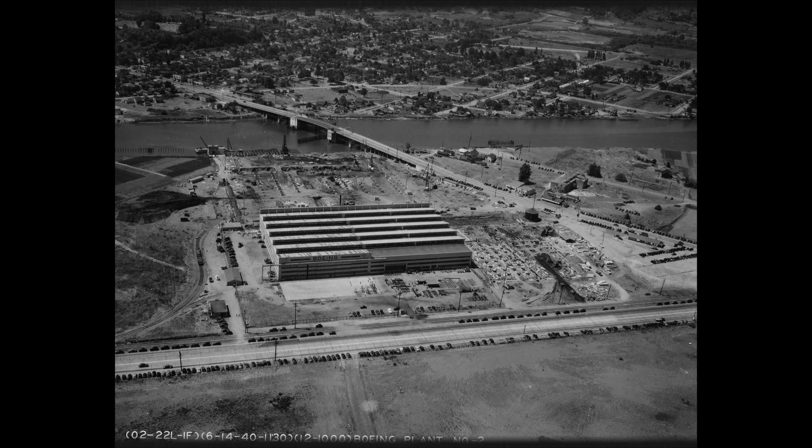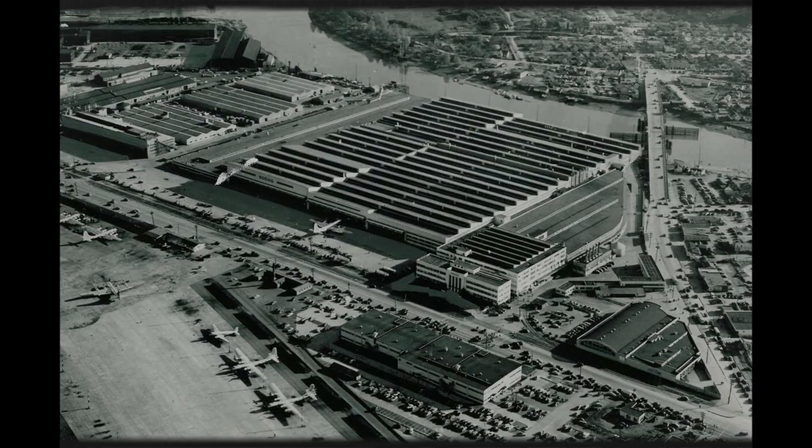Imagine it's January 1942. Deep in the heart of Seattle, Boeing Plant 2 is supposed to be the beating heart of America's war effort. Its mission is simple, monumental, and utterly vital: to pump out so many B-17 Flying Fortresses that their sheer numbers would literally darken the skies over Nazi Germany.

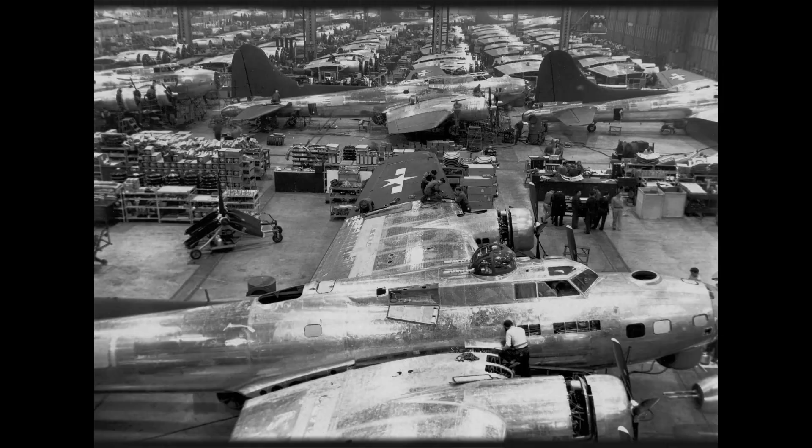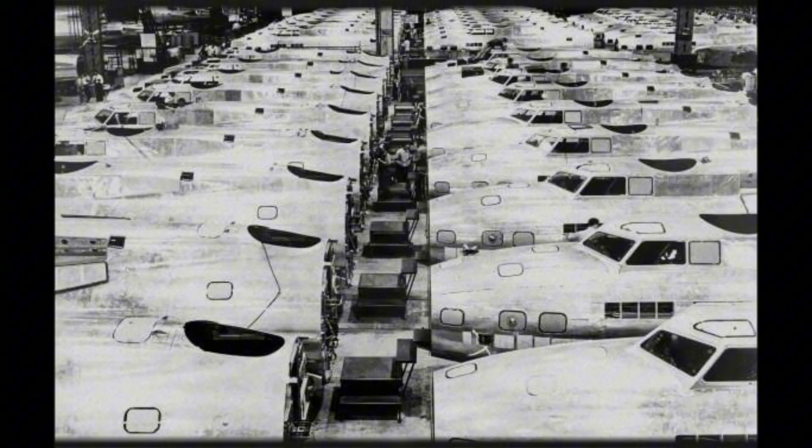But on the factory floor, there's no triumphant roar of production. There's only the grinding, deafening silence of failure. It looks less like an assembly line and more like an industrial traffic jam. 63 B-17 bombers, 63 magnificent, deadly promises, sit frozen in various stages of incompletion. Each one is a monument to a promise America couldn't keep.

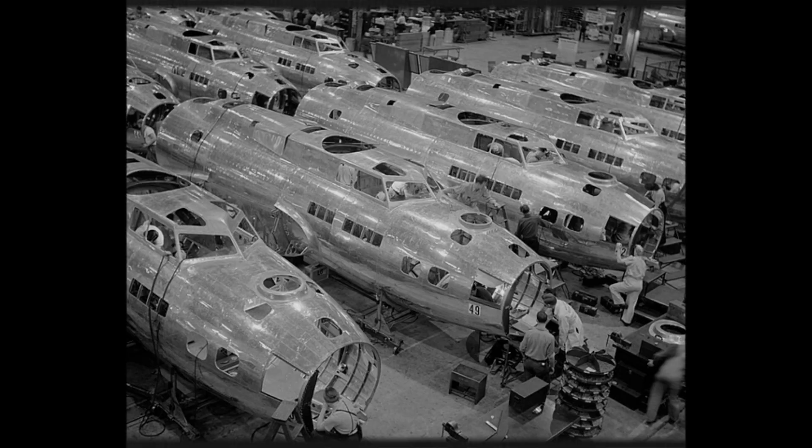The numbers were horrifying. The Army Air Forces, desperate for air power, had ordered 3,615 bombers to be delivered throughout the year. 3,615. And how many had Boeing managed to deliver? 9. Just 9. General Henry Hap Arnold, the commanding general of the Army Air Forces, wasn't just disappointed, he was furious. This wasn't a spreadsheet problem, it was an existential threat.

On January 15th, he met with a room full of terrified Boeing executives, and he didn't mince words. The message he delivered was brutally clear. Without bombers, there would be no strategic bombing campaign. Without a strategic bombing campaign to cripple German industry from the air, American soldiers would have to face an entrenched, fully supplied Nazi war machine on the ground for years. The math was simple, and it was terrifying. Every day of delay would be paid for in blood.

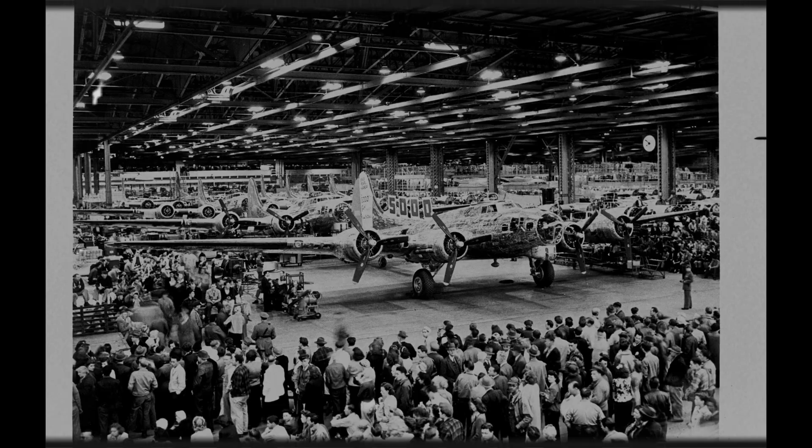So what was the problem? It wasn't manpower. In a patriotic frenzy, Boeing had hired over 30,000 workers in just 6 months. Many of them were women, Rosie the Riveters, who had never set foot in a factory before, but who were now the backbone of the war effort. It wasn't materials either. The aluminum giant Alcoa was shipping in raw materials faster than Boeing could possibly use them. Mountains of gleaming aluminum sheets sat waiting.

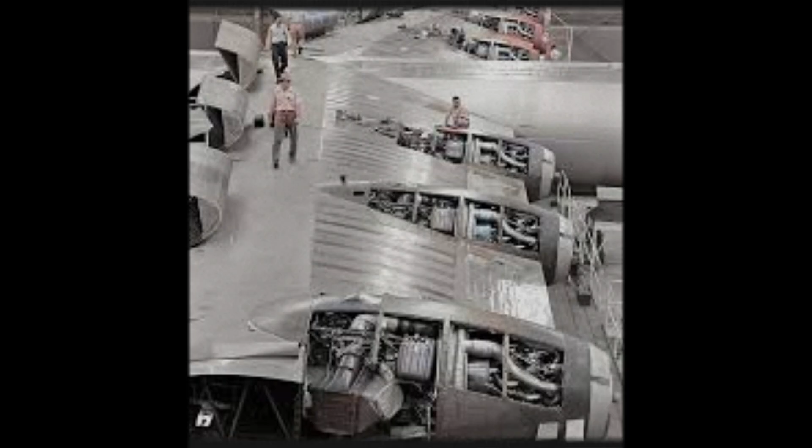The crisis was something deeper, something nobody had anticipated. The bombers themselves, they were just too damn complex to build quickly. Think about this. Each B-17G model required 140,000 individual parts. The wings alone were a nightmare. A single wing demanded 12,000 rivets per side.

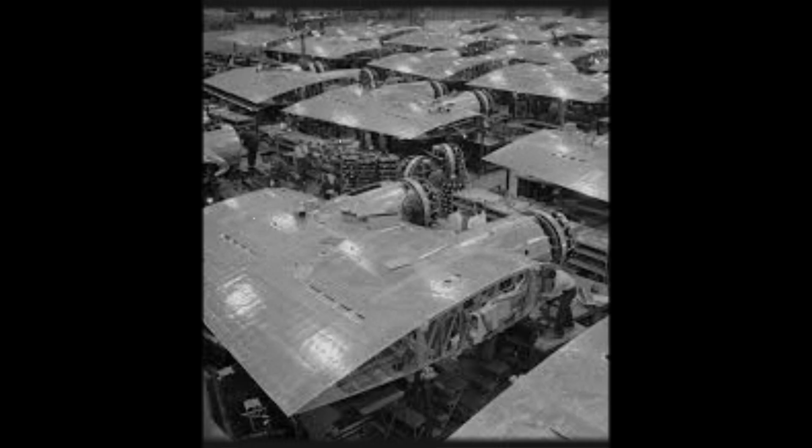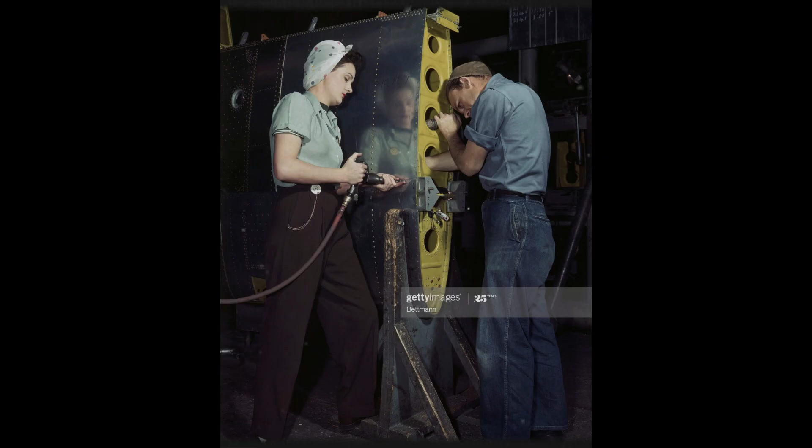These weren't just simple fasteners. They had to perfectly connect 7 overlapping layers of aluminum skin to a complex internal framework. And that framework had to be strong enough to withstand the unimaginable stresses of combat maneuvers, pulling up to 6 Gs while dodging enemy fighters. The traditional assembly methods, the ones perfected on smaller, simpler aircraft, had simply collapsed under the weight of this complexity.

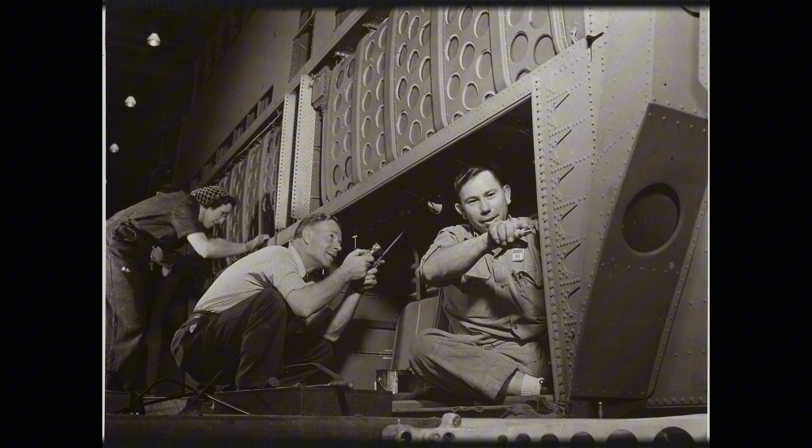Every morning at 5 a.m., Philip Johnson, Boeing's production manager, would walk the factory floor, clipboard in hand, and watch the same soul-crushing nightmare unfold. He'd stop at Wing Assembly Station number 4. There, 17 workers were clustered around a single massive wing section. They weren't working together so much as they were getting in each other's way.

The choreography was insane. A riveter would finish a seam, step back, and immediately another worker would need to access the exact spot he had just vacated. Then a third worker needed that same position for a different rivet line. It was a chaotic ballet of inefficiency.

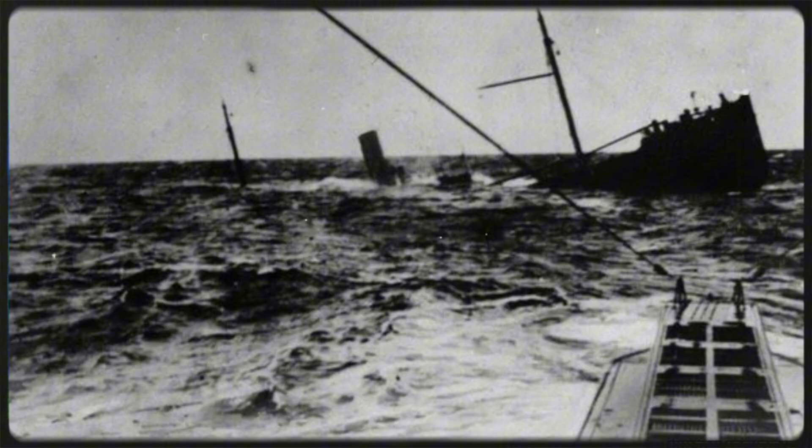Johnson timed it himself, clicking his stopwatch with a growing sense of dread. 20 hours and 14 minutes. That's how long it took to complete one wing assembly, from a bare framework to the final polished rivet. 20 hours. Over the skies of Germany, the British Royal Air Force was losing bombers faster than that.

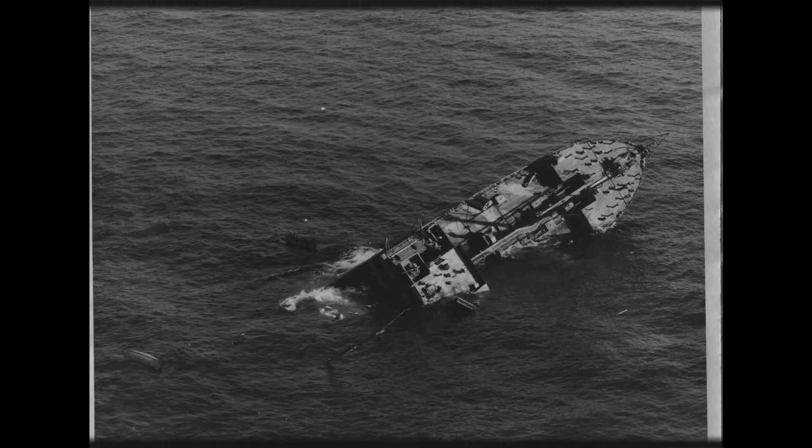The consequences of this bottleneck rippled across the entire war. Every Luftwaffe fighter that went unchallenged because American bombers weren't in the sky meant more merchant ships, full of vital supplies, were being sunk in the cold Atlantic. It meant more factories in the Ruhr Valley could run at full capacity, churning out tanks and guns for the Eastern Front. It meant more time for Nazi Germany to consolidate its iron grip on Europe.

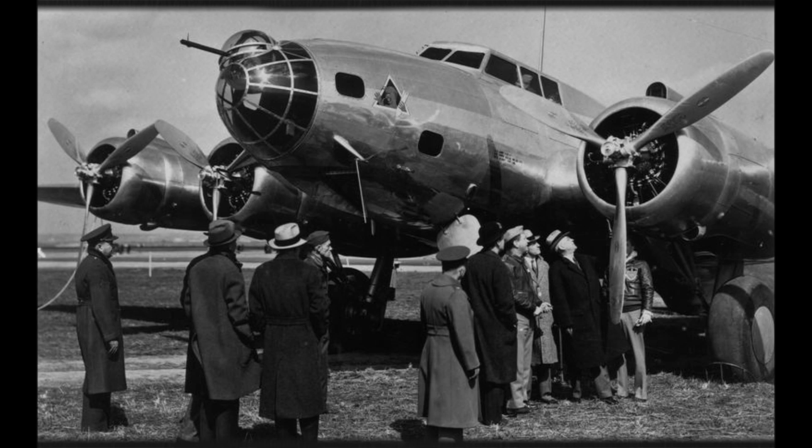Boeing's engineers, the best in the world, had tried everything they could think of. They redesigned tool access points. They created specialized jigs and fixtures to hold the wing sections. They even experimented with different crew sizes, thinking maybe fewer workers would reduce the congestion.

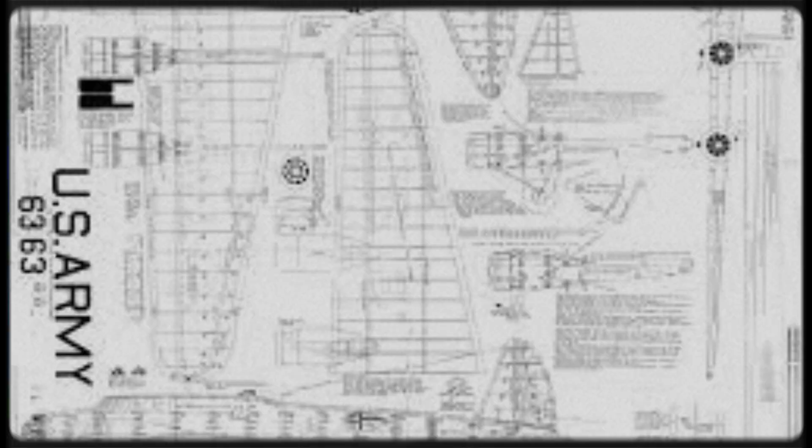Nothing worked. The fundamental problem was written into the aircraft's DNA. The rivet pattern, specified in the holy grail of engineering blueprints, required work crews to access the same physical space in an overlapping sequential order.

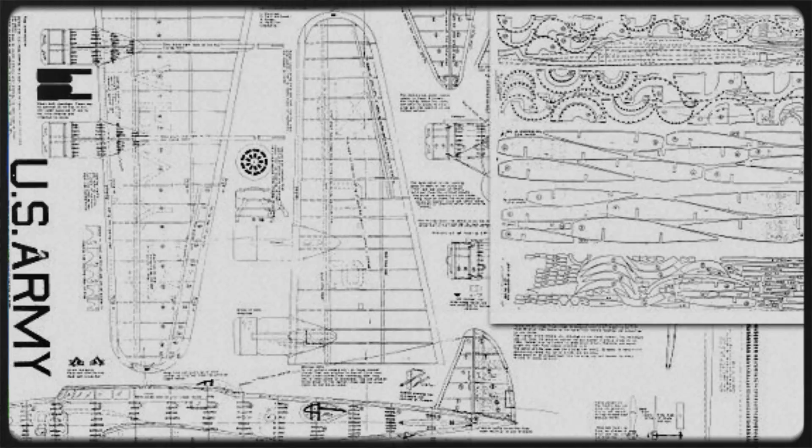You couldn't parallelize the work. You couldn't just throw more workers at it to speed it up. It was a bottleneck designed by geniuses, a perfect trap. By late January, the whispers began. Boeing executives started having quiet, desperate conversations about the unthinkable, telling the Army they simply couldn't meet the production targets. Some even suggested bringing in rival companies like Douglas or Consolidated to take over primary production. It would be a humiliating, catastrophic failure.

On January 28th, a classified memo circulated among senior management. The subject line read, "Crisis Assessment, B-17 Program Viability." The subtext was clear. Nobody wanted to be the person who lost the war because they couldn't figure out how to rivet a piece of aluminum fast enough.

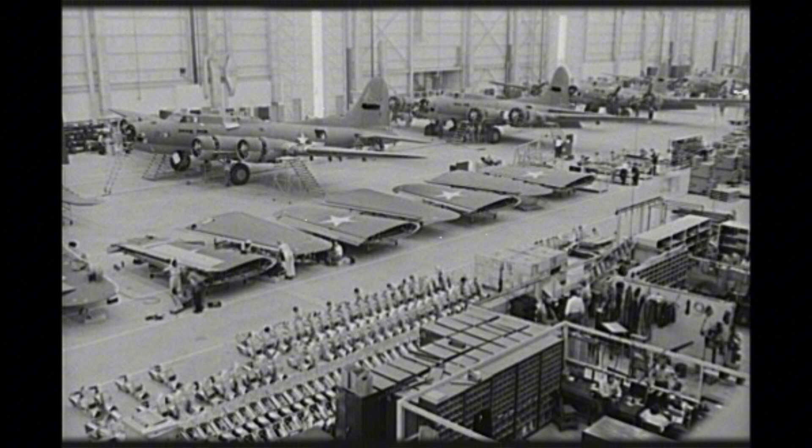Let's zoom in. Walk into Wing Assembly Station 4 on any given morning, and here's what you'd see. What looked like organized chaos that wasn't actually organized. The wing section, a massive skeleton of aluminum ribs and spars spanning 32 feet, lay on an enormous jig. Waiting beside it were 7 layers of aluminum sheeting, each one precisely cut and pre-drilled with thousands of holes, ready to be attached in a very specific sequence.

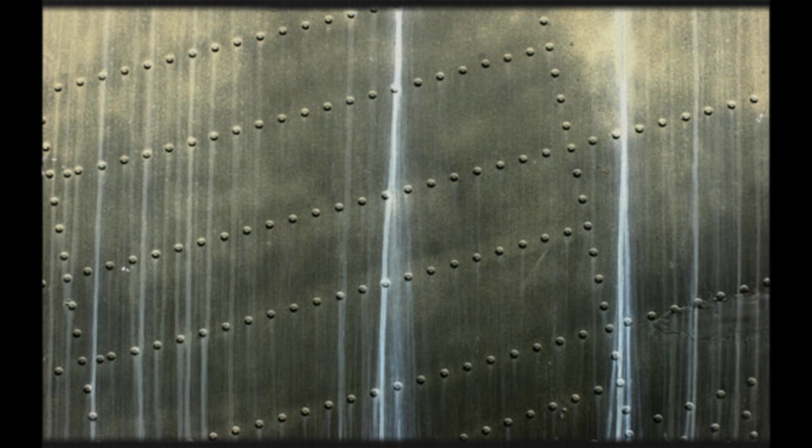The process was supposed to start from the wing root, the thick part that would eventually bolt to the fuselage, and work its way outward toward the delicate wingtip. Sounds straightforward, right? It wasn't. The engineering blueprint, a document treated with near religious reverence, specified that the rivets had to be installed in perfect parallel rows running from the wing's leading edge back to the trailing edge. Row 1, then row 2, then row 3, marching backward like disciplined soldiers.

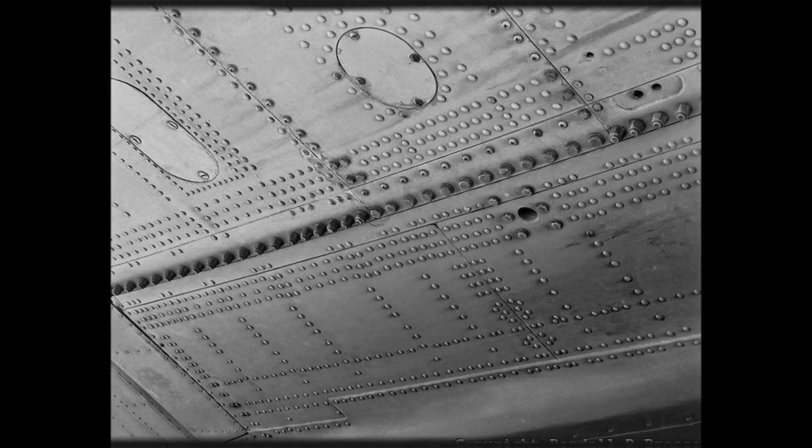From a structural perspective, this made perfect sense. Each row of rivets reinforced the one before it, creating an overlapping shingle effect that brilliantly distributed stress loads across the entire wing surface. The engineers at Boeing's developmental center had calculated every single rivet's position to optimize the strength-to-weight ratio. On paper, it was beautiful, a masterpiece of structural engineering. On the factory floor, it was a disaster.

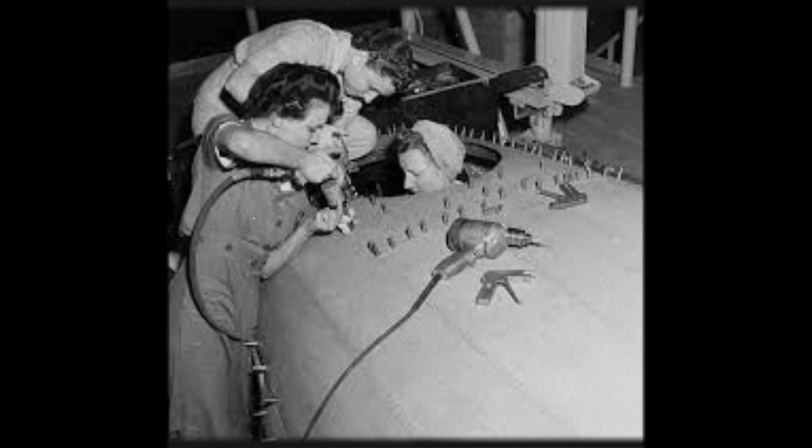Miss that timing by even half a second, and you got a loose rivet, a useless rivet, a rivet that had to be painstakingly drilled out and replaced. Each mistake cost 3 minutes. Multiply that across 12,000 rivets, and a few small mistakes quickly became a catastrophic loss of time.

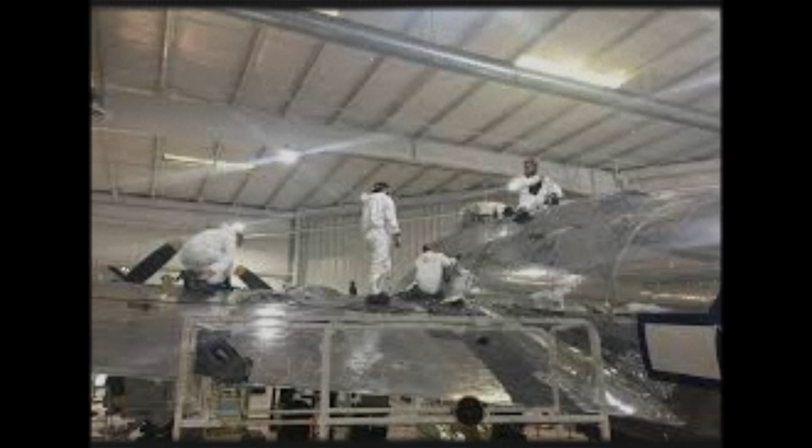But the real nightmare began when it was time to start row 2. To access row 2's rivet line, the new work crew needed to position themselves exactly where row 1's crew had just been working. Except, row 1 wasn't completely finished. Quality inspectors needed to check every 10th rivet with a borescope, a tedious, painstaking process that took a full 15 minutes per wing section. So, the row 2 crew waited and waited. Meanwhile, the row 3 crew, already suited up and ready to go, stood around, burning daylight, watching the clock tick.

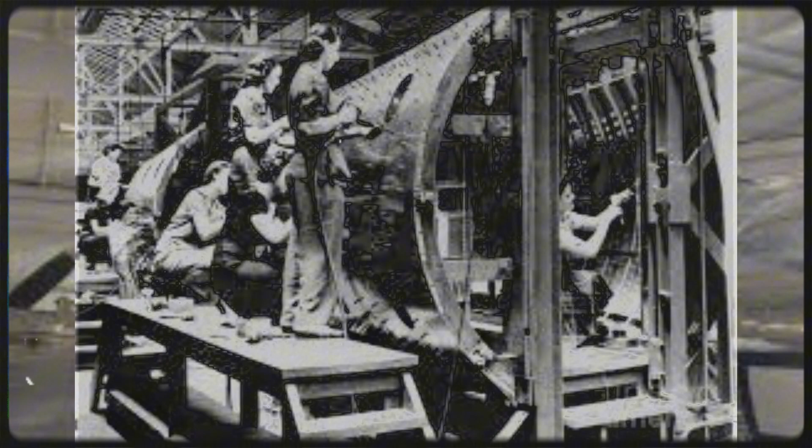The production schedule was a fantasy, calling for parallel work streams that the physical reality of the wing's geometry made utterly impossible. You simply couldn't fit enough people around the structure to rivet multiple rows at the same time. And then there were the tools themselves. The rivet guns weren't delicate precision instruments. They were industrial pneumatic hammers that vibrated with such force they shook your entire body when fired.

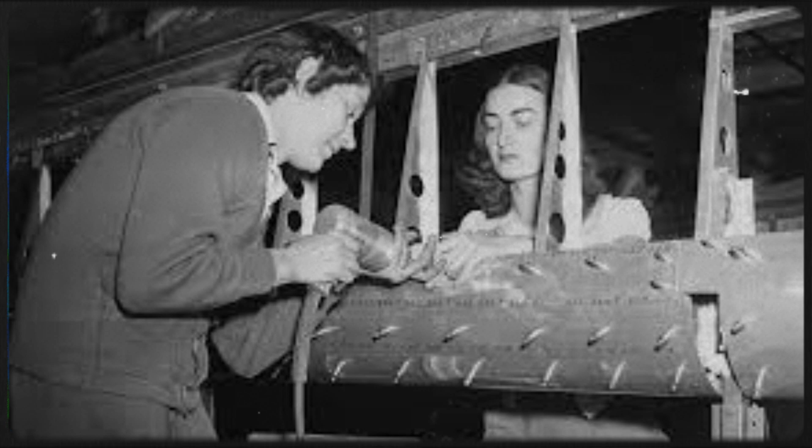The compressed air hoses that powered them snaked across the factory floor like demented pythons, constantly getting tangled with electrical lines for the inspection lights, tripping up workers who were just trying to move from one station to another. Think about it. One riveter moving from position A to position B had to unplug his air hose, carefully coil it up, navigate around 3 other workers, find a new air coupling station, plug back in, and only then could he resume his work. That 30-second process happened 70 times per wing section.

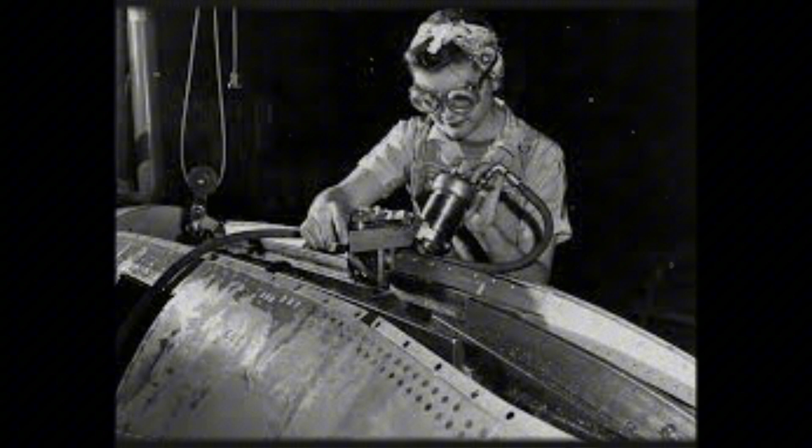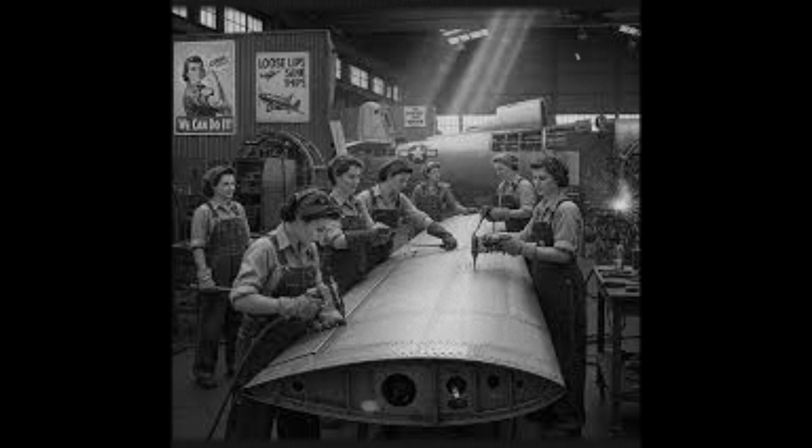The aluminum sheeting, an excellent conductor, absorbed all that heat and began to expand microscopically. Not by much, just 0.03 of an inch per 10-foot section. But when you're trying to align pre-drilled holes that have a tolerance of only 0.02 of an inch, that expansion was a disaster. Holes didn't line up. Riveters ended up spending 15% of their time using tapered reamers to enlarge holes that had shrunk out of alignment as the metal cooled. None of this, the tangled hoses, the heating, the thermal expansion, appeared in the engineering specifications, because nobody in a clean, quiet office had ever anticipated 17 people working in such close proximity for such an extended, exhausting period of time.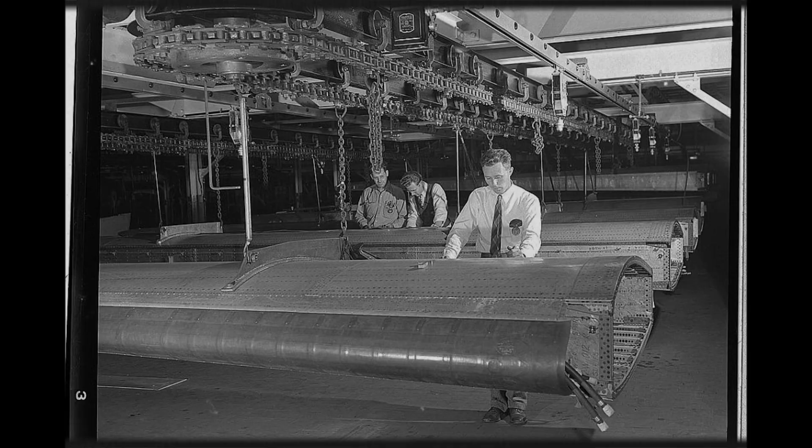Frank Szymanski did not look like the man who would change the course of the war. He was 31 years old, 5'7", with hands that were permanently stained with aluminum dust and cutting oil. Before Pearl Harbor, he'd worked at a Chrysler plant in Detroit, installing door panels on Windsor sedans. It was repetitive work, mindless work, the kind of job where your hands knew what to do long before your brain caught up. When Boeing started its massive hiring surge in late 1941, Frank packed up his wife and 2 daughters, moved to Seattle, took a room in a boarding house near the plant, and joined the swing shift at the now infamous Wing Assembly Station 4. He started work at 4 p.m. and finished at midnight, 5 days a week, sometimes 6 when production quotas were particularly desperate.

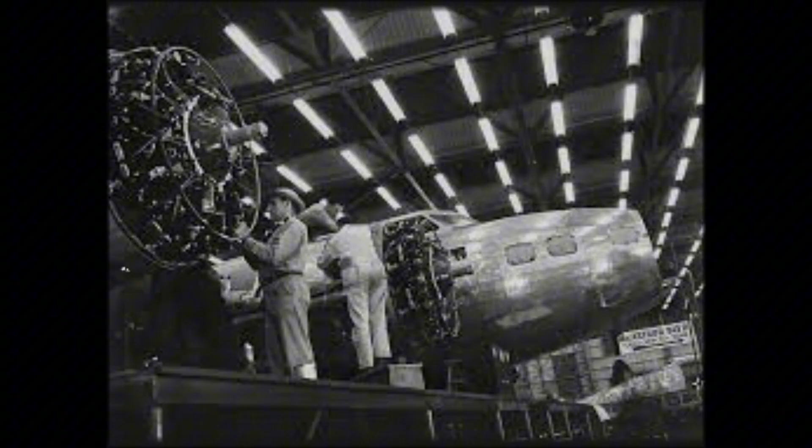What made Frank different wasn't his riveting skill. Dozens of other workers could match his speed and precision. What made him different was that Frank couldn't stop watching. He didn't just see his own work, he saw the whole broken process. Most riveters focused on their immediate task: line up the gun, squeeze the trigger, move to the next rivet, repeat 400 times a shift. But Frank saw the entire ballet. He noticed that Jenkins, working on row 3, was always waiting for Patterson to finish row 2. He noticed that Patterson was always waiting for the quality control team to clear row 1. He saw, with a clarity that seemed to elude everyone else, that the prescribed sequence created a cascade of delays that compounded geometrically as you moved across the vast surface of the wing.

On February 4th, during his midnight break, Frank sat on an overturned parts crate, eating a bologna sandwich and staring at a completed wing section that was being moved to final assembly. Something about it bothered him. The rivet pattern looked perfect from a structural perspective. Each row neatly overlapped the previous one, creating that shingle effect the engineers loved so much. But Frank kept thinking about his old job at Chrysler. When they installed door panels, they didn't start at one edge and work their way across. They started at 4 corners simultaneously and worked toward the center. Why? It was simple. Because it allowed 4 workers to operate in parallel without ever getting in each other's way.

The geometry of the door panel made parallel work possible. He looked back at the wing schematic posted on the station's bulletin board. The rivet pattern ran in those perfect, straight lines, from leading edge to trailing edge. Parallel rows marching across the wing surface. But the wing itself wasn't a flat rectangle. It was a complex, 3-dimensional structure. It had depth. It had internal ribs creating separate chambers. It had access points at specific, designated locations. And then the idea struck him. A question so simple and yet so profound.

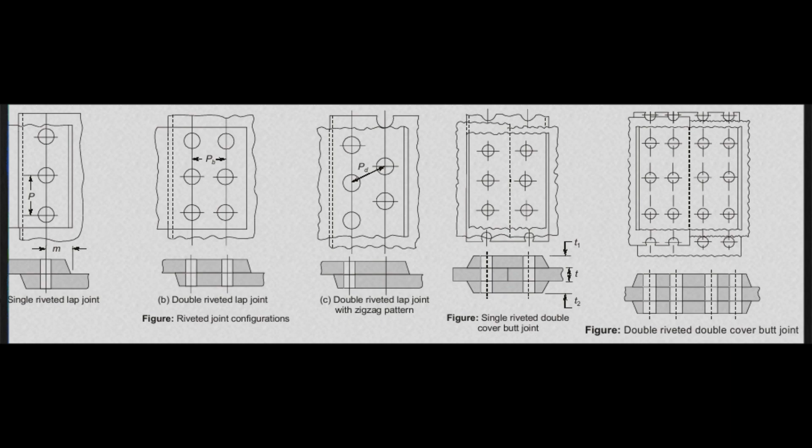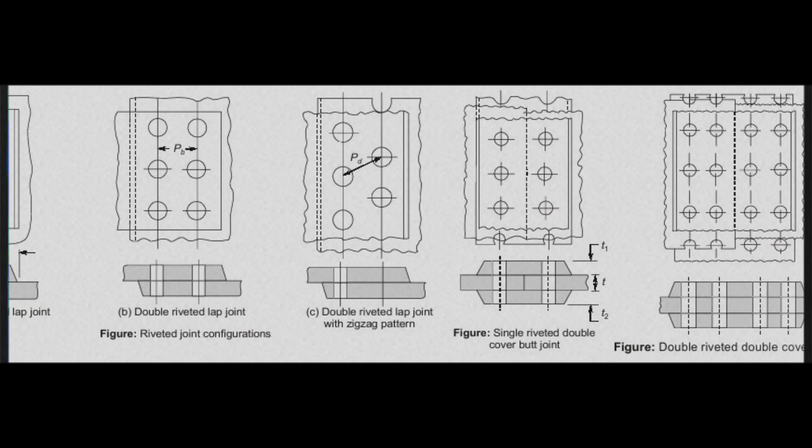Instead of those neat straight rows, he drew a pattern that looked almost random. He drew clusters of rivets around the strong internal structural ribs where access was easiest. Then he drew radiating lines connecting those clusters, following the natural contours of the wing's internal structure. It looked wrong. It looked like someone had spilled a box of rivets on the blueprint and just decided to leave them where they fell.

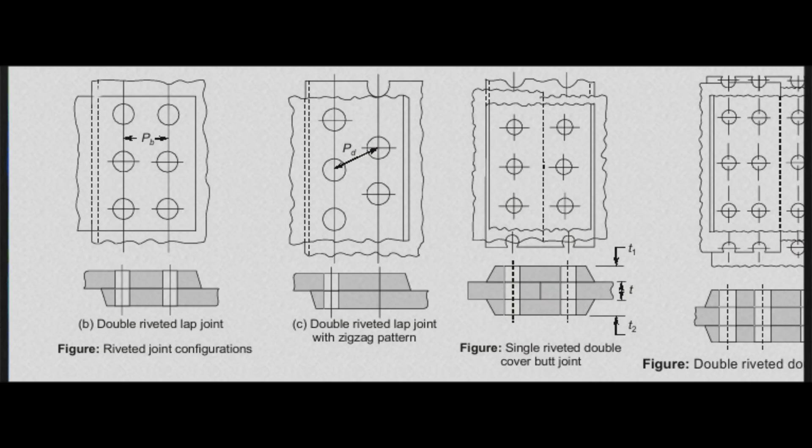But as Frank traced the pattern with his calloused finger, he realized something crucial. With this pattern, you could have 5 workers riveting at the same time, and none of them would ever need the same physical space. Worker 1 could be at the wing root, inside the main spar chamber. Worker 2 could be mid-wing, accessing the interior through an inspection panel. Worker 3 could be working on the trailing edge, which was shallow enough for top-down riveting without even needing a bucker. They'd never intersect. The traffic jam would disappear.

The structural implications worried him, though. He knew the engineering blueprint specified that parallel row pattern for a reason. Words he only half understood, like load distribution and stress concentration, echoed in his mind. But then he thought about something else he'd noticed on the floor. Rivet failures almost never happened where 2 rows met. They happened at transition points, where the wing skin changed thickness, or where cutouts for the fuel tanks interrupted the neat pattern. The rows themselves weren't magical, they were just one way to distribute fasteners across a surface. Maybe, just maybe, they weren't the only way.

Frank knew what would happen if he, a lowly riveter, walked up to a production supervisor with his scribbled time card. They'd smile politely, pat him on the back, tell him the brilliant engineers had spent months calculating those rivet positions, and send him back to his station. The hierarchy in Boeing Plant 2 was rigid. Engineers designed, supervisors managed, workers assembled. Nobody expected innovation from a guy whose job title was Riveter Grade 2.

But Frank had one advantage. He worked the swing shift. And the swing shift supervisor, a man named Bill Hendricks, was different. Hendricks had started as a sheet metal worker himself before being promoted in 1940. He still had the grit of the factory floor under his fingernails. And he actually listened to the workers, a trait that made him either remarkably progressive or dangerously naive, depending on which manager you asked. On February 11th, Frank caught Hendricks during the 8 p.m. shift change, and, his heart pounding, showed him the sketch. Hendricks stared at it for a long, silent time.

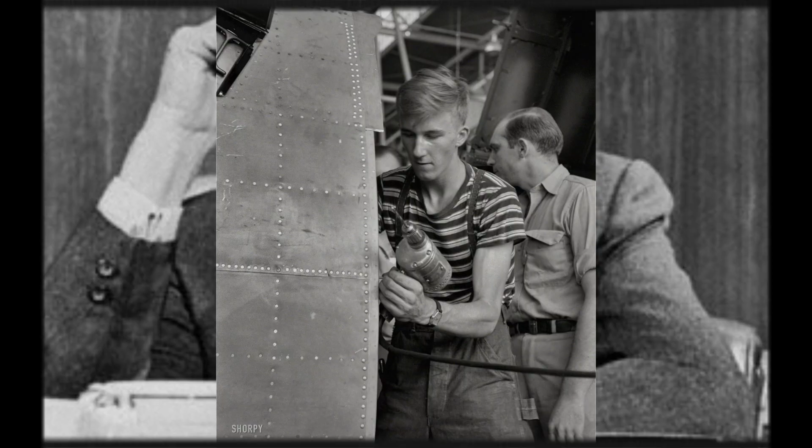The principle Hendricks was describing was the gospel of modern aerospace engineering. It came from the work done by the legendary Theodore von Karman and his team at Caltech in the late 1920s. They had proven, mathematically, that fastener patterns in load-bearing structures needed to follow what they called stress trajectories, the invisible lines of force that flow through metal under pressure. A B-17 wing carrying 6,500 pounds of fuel plus the structural weight of 4 massive engines experienced enormous bending stress during flight. The bottom surface was under tension, trying to stretch apart. The top surface was under compression, trying to squeeze together. Right along the middle, the neutral axis, the stress approached zero.

Von Karman's equations showed that fasteners needed to be densest where the stress was highest, and could be sparser where stress was minimal. The parallel row pattern achieved this perfectly. Each row corresponded to a specific stress magnitude, with rivet spacing meticulously calculated to match the load requirements. Frank's pattern threw all of that out the window.

His clusters placed dense rivet concentrations around the structural ribs, not the stress lines. His radiating connections followed the convenience of worker access, not the calculated load paths. From a classical engineering perspective, it was gibberish, utter nonsense.

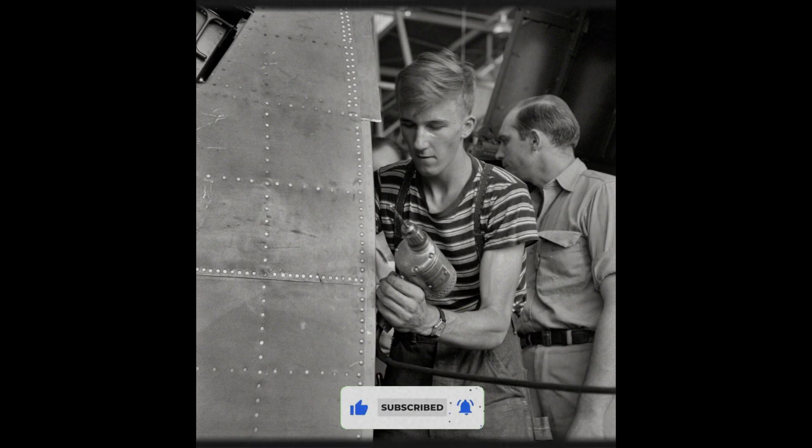Sure, the wing might hold together during taxi tests, it might even survive the first few flights. But under the sustained, violent stress of combat, microfractures would inevitably develop where the rivet pattern failed to match the stress pattern. Those fractures would propagate, the wing would fail, men would die.

Hendricks explained all of this to Frank right there on the noisy factory floor, shouting over the rhythmic roar of the pneumatic guns. Then he asked a question that changed everything. But did von Karman ever consider assembly efficiency as a structural factor? Frank looked confused. Hendricks leaned in closer.

Think about it. If it takes us 20 hours to rivet a single wing, and we're making mistakes because our workers are exhausted and cramped and tripping over each other, how many of those 12,000 rivets are actually installed to perfect specification? How many are slightly loose because the bucker missed his timing? How many holes are slightly reamed out because they didn't align perfectly? Your pattern might be theoretically weaker, Frank, but what if it produces practically stronger wings because the installation quality is perfect?

This was heresy. Absolute heresy. Boeing's quality control processes were built on the assumption that workers followed the procedures correctly. The procedures were designed around the engineering specifications. If wings were failing quality checks, you didn't change the design, you retrained the workers, or you fired them and hired better ones. You didn't redesign the damn aircraft to accommodate worker limitations. That was backwards thinking. That was letting the tail wag the dog.

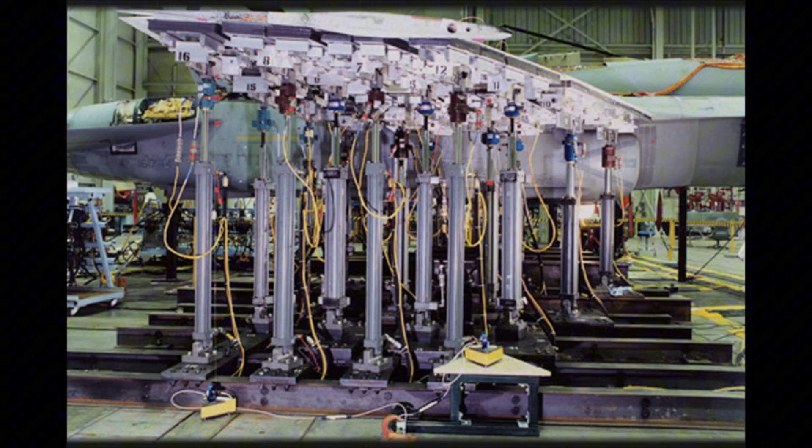He called over Jimmy Chen, the graveyard shift's lead quality inspector, without explaining what he was looking at. Chen, a meticulous and notoriously grumpy inspector, grabbed his toolkit and started a full inspection protocol, the same one he'd run on 200 previous wings. He checked rivet spacing with calipers. He used a thickness gauge to verify the sheet metal compression. He tapped each rivet head with a small ball-peen hammer, listening for the solid thunk that indicated a proper seating versus the hollow ping of a loose rivet.

40 minutes later, Chen looked up, bewildered. "This passes," he said. "I don't know what crew did this, but it's the cleanest work I've seen in months." Douglas told him how long it took. Chen thought he was joking. Then he thought the stopwatch was broken. Then he started his inspection all over again, because wings that were riveted that fast shouldn't be this clean. There had to be mistakes, rushed work, something wrong. He found nothing. The wing was perfect.

Better than perfect, actually. Chen had been inspecting B-17 wings since July 1941, and he kept a private log of defect rates that he never showed to management.

The average wing had around 140 rivets that needed some kind of attention during quality control: loose rivets, misaligned holes, various installation errors. This wing had 11. Just 11, less than one-tenth the normal defect rate.

But passing a visual inspection didn't mean the wing would survive under real flight loads. The rivet pattern was still, from a structural engineering standpoint, completely and utterly wrong. Douglas knew they needed a real test, the kind that required massive equipment and authorization he absolutely did not have.

At 3:30 a.m., he made another unauthorized, career-ending decision. He called the night crew at Boeing's structural test facility in Building 7 and told them to prepare for an emergency stress test. He didn't mention that the wing used an unapproved, heretical rivet pattern. He just said they needed rush testing on a wing section for production validation purposes.

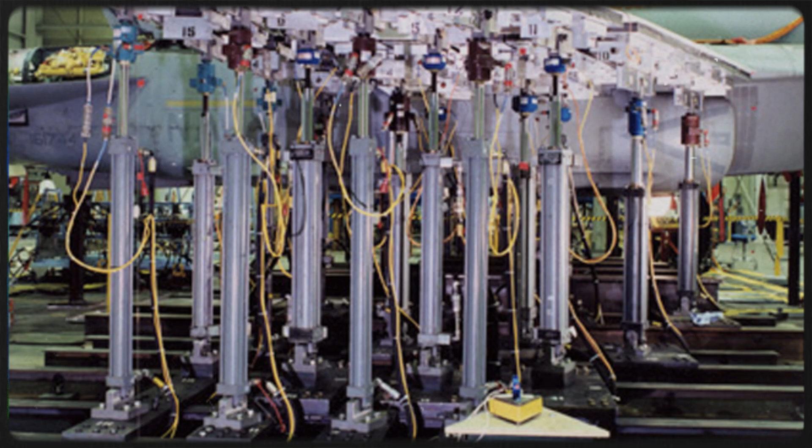Douglas stood there at 5:47 a.m., the dawn light beginning to filter through the grimy factory windows, trying to understand what he was seeing. Frank's pattern had placed the rivet clusters around the main structural ribs, and those ribs were the primary load-bearing members of the entire wing.

By concentrating the fasteners exactly where the structure was strongest, Frank had accidentally created a pattern that reinforced the wing's natural load paths, instead of fighting against them. The radiating connections between the clusters acted like secondary stress distributors, channeling the loads away from weak points.

It wasn't random at all, it was organic. It matched the way forces actually flowed through the structure, not the way engineers in an office thought they should flow.

By 6 a.m. on February 21st, Douglas knew he had to take this to someone who could actually authorize a full-scale implementation. Not Eccles, the chief engineer, who would kill it on principle alone. He went straight to the top.

He went to James Murray, Boeing's vice president of operations, waking him up at his home in the wealthy Laurelhurst neighborhood. Murray arrived at the plant at 7:15 a.m., still in his weekend clothes, and demanded to see everything: the test data, the inspection reports, the time logs.

He watched Douglas's hands shake as he confessed everything they'd done without authorization. Murray's face was an unreadable mask of stone. Then, Murray asked the only question that mattered.

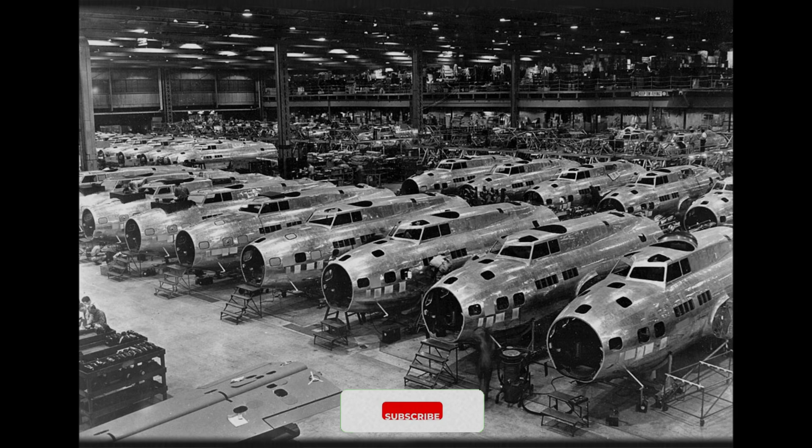Can we train 200 riveters to use this pattern by Monday? Douglas hadn't even thought that far ahead. He'd been so focused on proving the concept worked that he hadn't considered the logistics of scaling it. But Murray was already doing the math in his head. If one wing assembly went from 20 hours to just 2 hours, and Boeing had 42 wing assembly stations, that meant they could increase wing production by a factor of 10 without hiring a single additional worker.

Wings were the bottleneck. Fuselages were being assembled faster than they could be mated to wings. Tail sections were stacking up in a corner of the factory, waiting for completed aircraft. The entire production line was being choked by the speed of wing assembly. Fix that, and everything else would flow.

That morning, Murray made the call. Over Eccles's screaming objections, over protests from the entire engineering department, over dire warnings from Boeing's legal team about liability if the wings failed in combat, Murray ordered the new rivet pattern implemented across all production lines, effective February 25, 1942.

He gave Frank Szymanski a $40 a week raise, a fortune at the time, and the brand new title of Production Methods Specialist. He gave Hendricks a promotion to senior supervisor. He told Douglas his job was safe. And he told Eccles that if he didn't like it, he could personally explain to General Hap Arnold why Boeing was still only building 14 bombers a month.

The results were staggering. In March 1942, Boeing Seattle delivered 47 B-17s. In April, 91. By June, they hit 186 aircraft in a single month. But the real explosion came in July, when all 42 wing stations were fully converted to Frank's pattern and the workers had mastered the new, chaotic-looking sequence. July production, 284 B-17s. August, 319. September, 362 bombers rolled off the production line in a single month. That was more than the entire annual production of 1941.